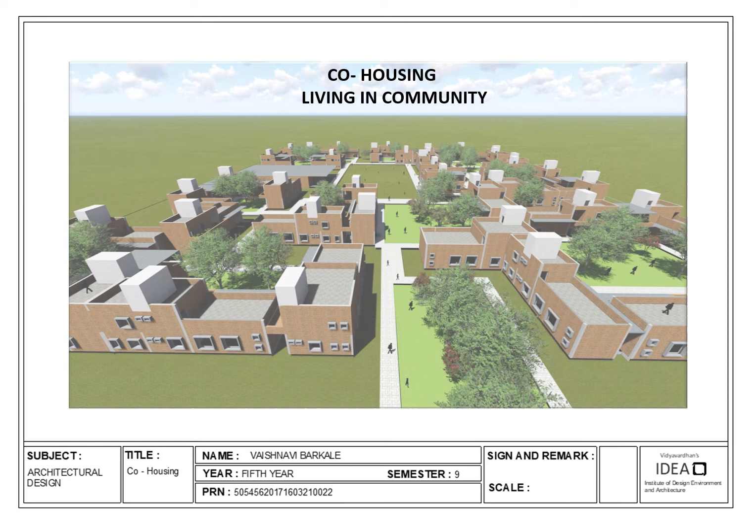Co-living or community living is all about the community living together and common activities shared by multiple people. Collective use of common and public spaces creates the opportunity for casual interactions. Co-housing is an intentional community where the built environment encourages social interaction within the community.

The aim of the project is to create an intentional community where people will share common spaces, which will create opportunity for casual interaction through built mass.

In the pandemic period, we all realized that humans cannot stay without being in a group or without interacting with people around them. There are many benefits of community living, such as it provides a sense of community and strengthens bonds between people. It creates bonds with neighbors, provides privacy, and also prevents problems such as loneliness. Co-living has the potential to make people feel comfortable and give them affordable living.

Coming to the design topic, which is to create intentional community housing for Paithani sari weavers at Yeola.

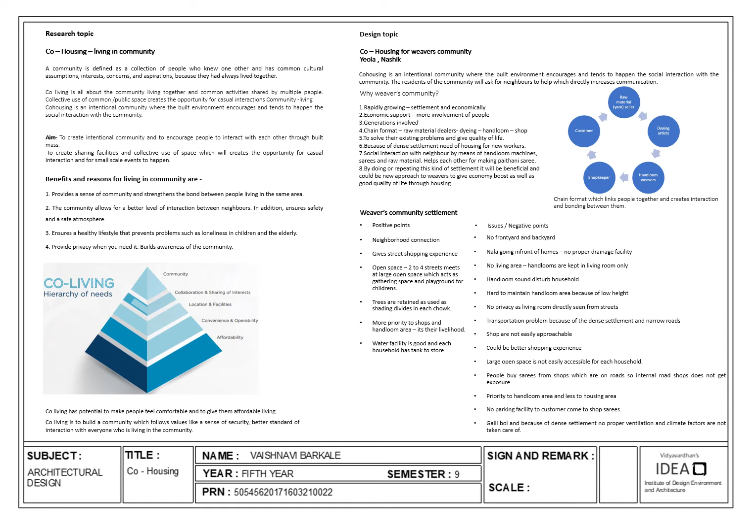History of Paithani and how it emerged throughout the years and how it came to Yeola from Paithan, followed by the process of Paithani sari making.

The first process is washing the reshim in salt water, then spinning it, and then the dyeing process is done to color the reshim, and then it is kept for drying, followed by the weaving process.

This is the live case study done at Yeola. Fatteburuj Naka is the place where a major number of Paithani weavers are living. Weaving Paithani is their main business for livelihood.

These are the types of households majorly seen there. All generations are involved in the weaving process. Workshop and household areas are attached to each other. Mostly, the living area of the house is used as a weaving area, which disturbs the housing area.

Also, there are factories in Fatteburuj Naka, but after talking to weavers working there, they wish to have their own working area and handlooms, which gives them more profit and ownership.

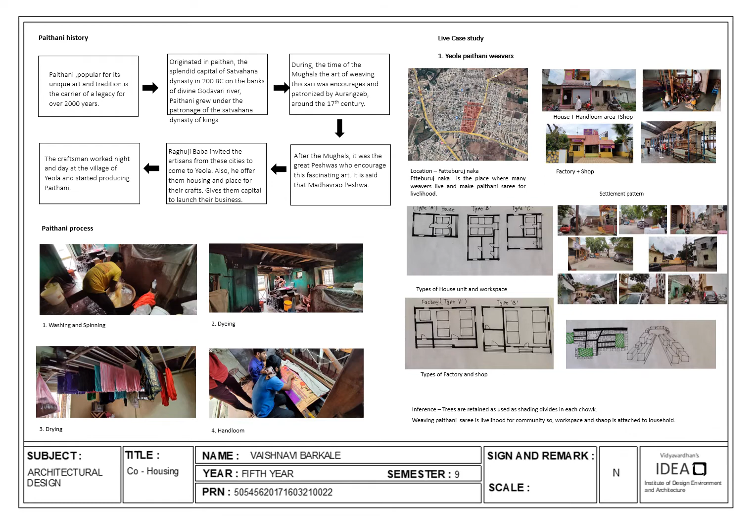Second case study is Ganga Maki Studio situated in Uttarakhand. The site consists of four L-shaped designer studios, a guest house, a small exhibition space, a dye house, and a canteen.

Inferences are: the design is completely built taking into consideration the local environment of weavers. Second, the lighting of the space is diffused, which is optimum for weaving. Innovative roofing techniques are used for the building.

The space is centered on the courtyard, giving an inclusive feeling to people working in the studio. Fourth, the dye house is placed separately to avoid fumes and heating.

Third case study is Belapur housing. Charles Correa ingeniously uses his trademark hierarchical open spaces to create a sense of home and community.

Inferences are: first, sense of community and neighborhood. Second, hierarchy of spaces, from closed spaces to semi-open spaces to open-to-sky large spaces. Third, provision of future expansion. Fourth, climate responsive cluster arrangement. Fifth, inward looking views and interactive spaces. Sixth, green spaces and vegetation creating visual boundaries.

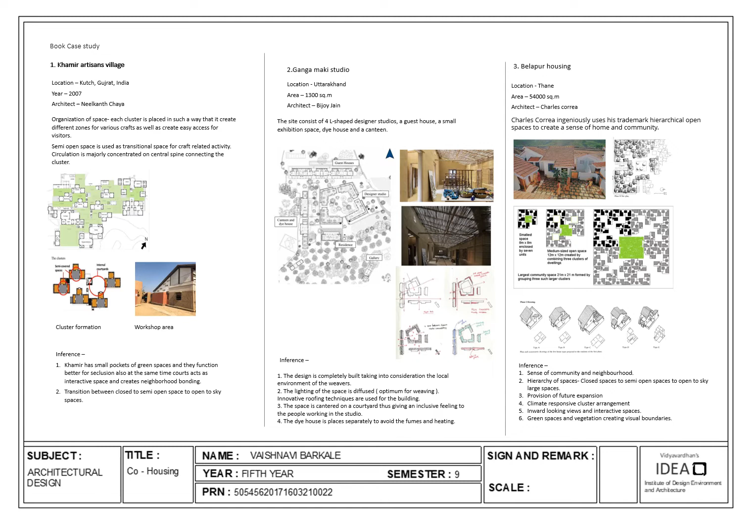The site is located at Fatteburuj Naka, which is the main location where major weavers live and work. The site is selected on the Aurangabad-Nashik highway, which will be easily accessible to customers who come to buy sari. Also, it is easy for transportation and export-import of raw material and finished material.

In the existing condition, transportation is not very easy due to narrow streets. The site area is 38,600 square meters. These are the photographs of the site.

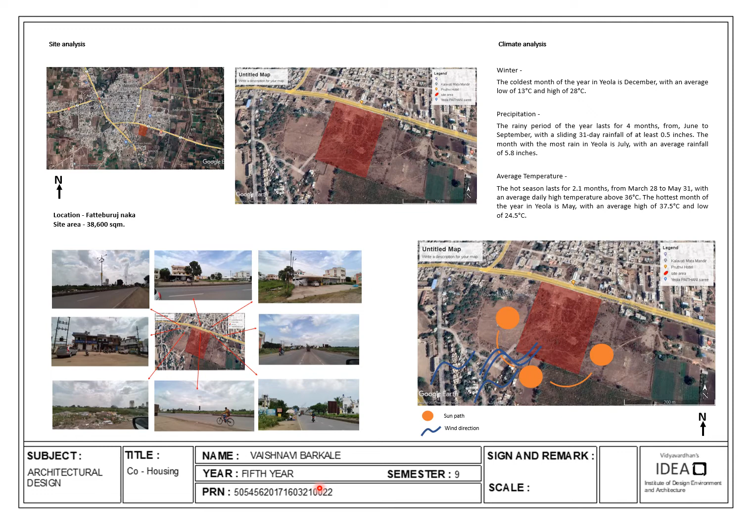After doing the case study and site analysis, I started creating cluster arrangement through a block model, taking into consideration shade and shadow and wind direction.

These were the options I explored, and then I finalized one cluster arrangement following the inferences of the case study and the positives and negatives of the existing Yeola settlement.

I created design parameters which can be applied to the design. The thought was to create activity pockets which will be connected to a large open space by the pedestrian pathway.

These small open courts will create small scale events and activities, encouraging people to come out into the courts and have interaction and community bonding.

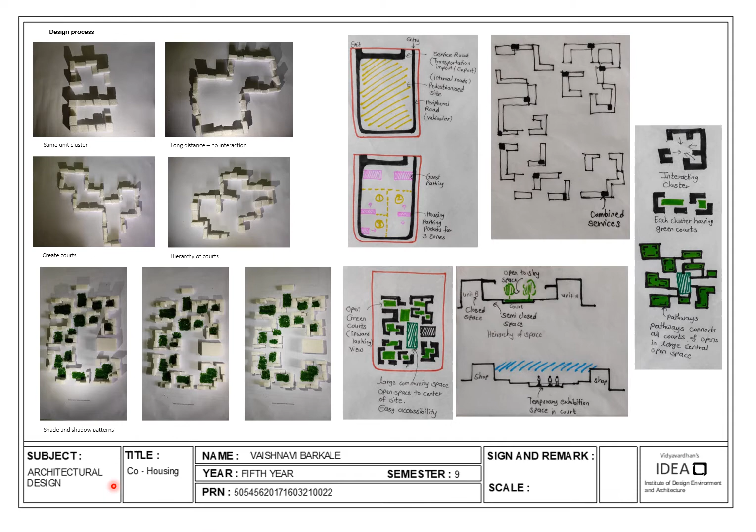Internal streets are completely pedestrianized so that people walk past their neighbor's unit, which will encourage small talks and create bonding. The arrangement of the cluster is done in such a way that airflow will reach every block.

That is the reason to have a lesser number of units at the windward side of the site. Each court is connected through a pathway and opens onto a large playground.

Number 1 is the service entry as well as guest entry. Number 2 is where customers who come to buy sari will park their vehicle and go from the entry court and experience the street shopping.

For relaxation purposes, they can use seating provided in each court. Tree pits are treated as a sitting area. In these courts, people can have casual interaction, and it also acts as a gathering space.

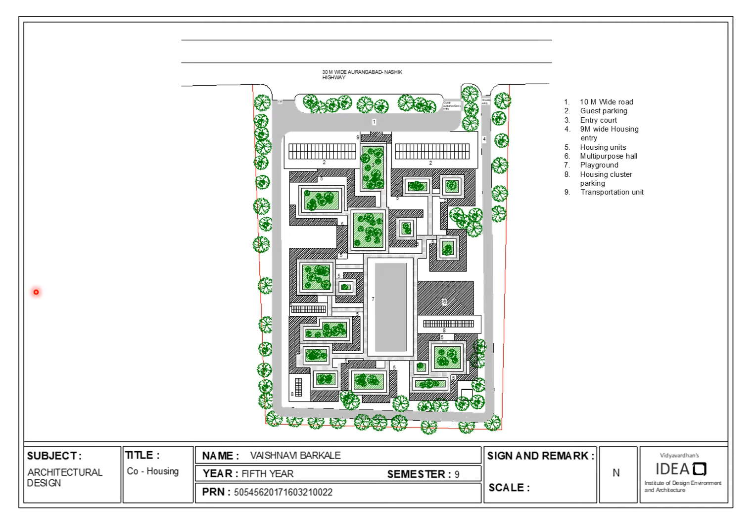Every cluster faces each other's front yard as well as backyard, which are good examples of interacting spaces. Each cluster has green courts so that people will gather there and interaction will happen.

The services of two adjacent blocks are combined, which will reduce piping cost. For the flooring, Shahabad tiles are used, and for outdoor hardscape, paver blocks are used for pathways.

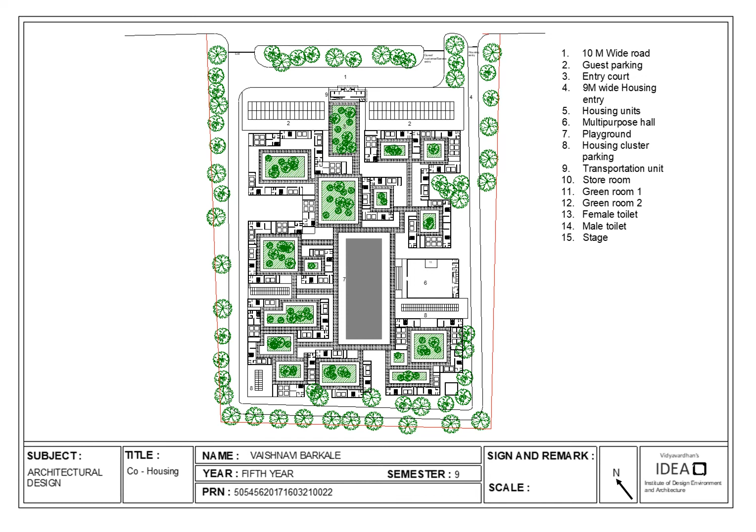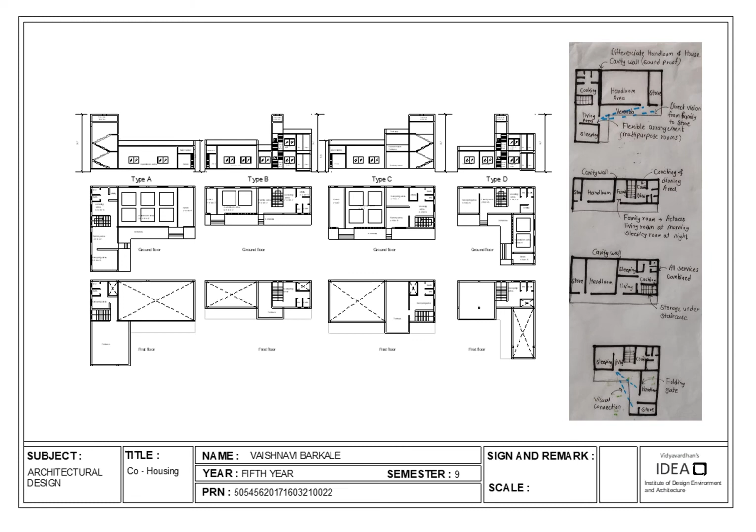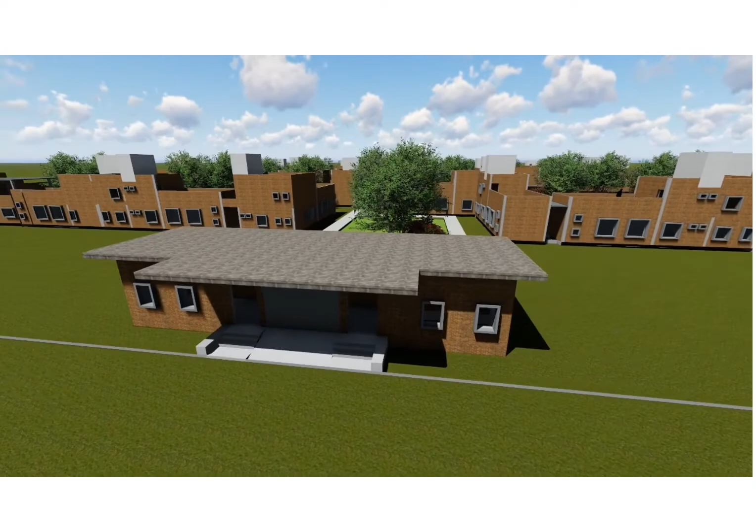These are the section and elevations. These are some 3D views. Thank you.